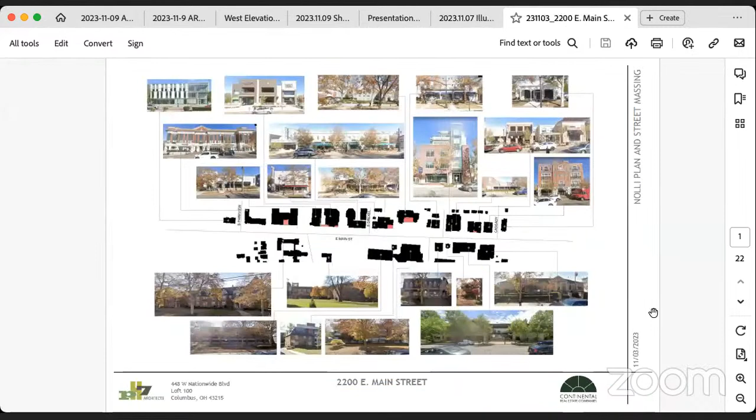Yes, if you want any of those individual sheets. Okay, we'll start here, this is good enough.

Just real quick, for the group, this is what's called a Nolli plan. This is a figure ground of your Main Street corridor, looking at both the north and south side of the street, basically from Parkview Avenue all the way up to Cassidy. So what you're seeing is the figure ground of the building frontages along that entire streetscape.

Then we tried to do a study, pointing out what the building masses on Main Street are and how those buildings are starting to reflect your Main Street guidelines. We had studied this long ago. This was not in our packet for the original ARB, but we did present this during the work session.

So we wanted to point out a way of describing what's going on. In particular, look at some of these red dots — those are negative spaces along the Main Street corridor that act as moments for the frontage of a building, for a patio that's part of a space, or just generally something along the way. But what you start to see is a rhythm and a pattern.

If you go to the next slide, we looked more closely at just Parkview to Drexel Avenue, and you see us trying to understand what rhythms are happening along Main Street and proportions specifically as related to the pedestrian way.

When you're on Main Street, you're interacting with buildings that are generally 2 and 3 stories in height. So what we've tried to do in our revisions, and what we have in front of you today, is really reflect that in the front of the building.

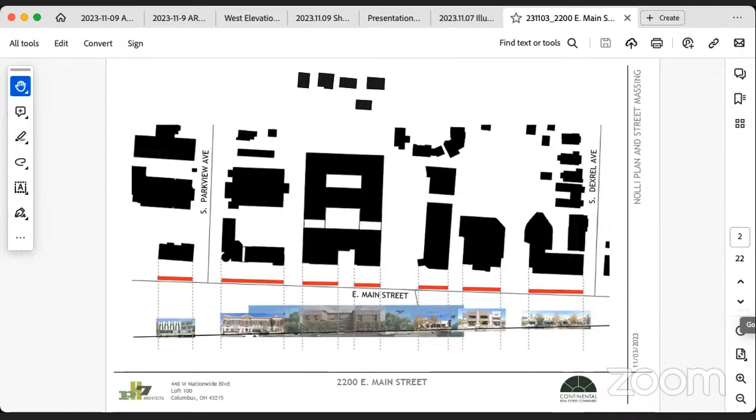Next page, this is the overall site plan. I'll come back to it and let Ryan speak to this in a minute. But I'd like to go forward a couple slides and we'll come back — sound good? Okay. I'll try to point on that one so everybody can see, I do have a pointer.

So what we've really tried to do is a couple things. One is to simplify the massing, simplify the materiality. By doing so, we've created two 2-story facades along Main Street — you've got one here and one here. These elements create that pedestrian way, or the pedestrian scale of your streetscape.

One of the comments from before was, is this a mid-block building or is this a corner building? I think the intent of that comment is that we were really celebrating corners in the last concept. In this design, we've really turned things inward.

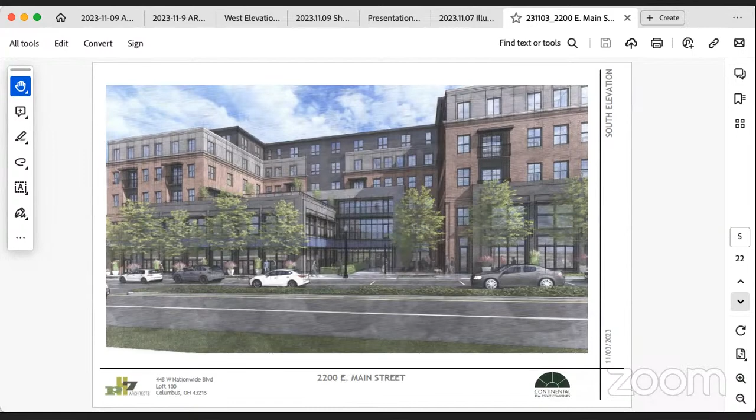Next slide, just another closer up slide of the hierarchy of this. One of the comments we heard, and I hope we're being pretty successful at it, is simplifying the hierarchy. So what we have is basically two masses that are brick facades and then erode the top a little bit by changing materiality. That vocabulary then turns the corner and starts to become a rhythm for the rest of the building, rather than it being more haphazard use of material on a facade.

Block of a building -- I think one of the comments we've had a couple times was what makes this uniquely Bexley, and what can make it uniquely Bexley. I think starting to have an identity of its own that doesn't share an identity with something else is what we think makes sense, and I think these things along the streetscape also tie it into what's happening in your community.

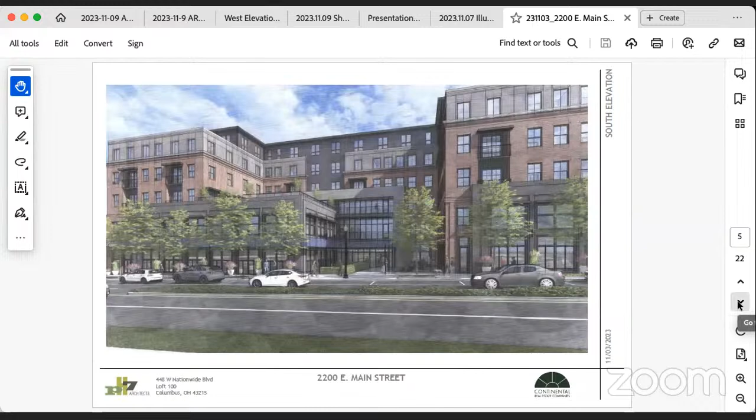Next slide. This is just a close up of that little space we were talking about. You can kind of see potential outdoor dining, and you've got potential entry into another retail space. So you've got this sort of confluence and crossing of different things happening.

You can go to the next slide if you want. This is looking at the other corner. As we move up the streetscape, this is the parking lot here that we're adjacent to, and what we've started to develop here is a public node. I know Ryan can speak a little more about it, but we don't exactly know what this is yet. What we're indicating is that this is the termination of a pedestrian connection all the way up to Bryden Road, so there's a cross connection through the city that terminates at this location. Maybe you can start to solve some of the challenges of the parking lot here, but definitely can activate this corner in a way that we think can be really successful.

The other thing that's interesting in this slide is part of this discussion about a sixth floor. In this slide you can see it a little better. What we were able to do by carving out this is we removed several units here, and we've basically taken a piece of the cake and placed it up on top. So we would call this a partial sixth floor -- we don't want it to be confused that this is the entirety of the building. We're really only talking about a sixth floor that's right here.

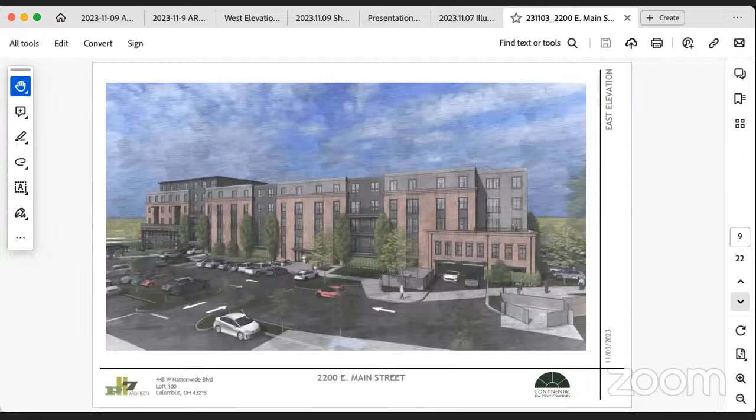So, obviously eager to hear your feedback on that. But if you keep going, I think we're getting close to what I wanted to share. We certainly want to let you guys speak, ask questions, and we're here to answer them. So I don't know if there's anything else on the site I really want to go into, unless you feel like there is.

We're here, we'll answer questions if we need them. Thank you. Okay, we will go next to the public.

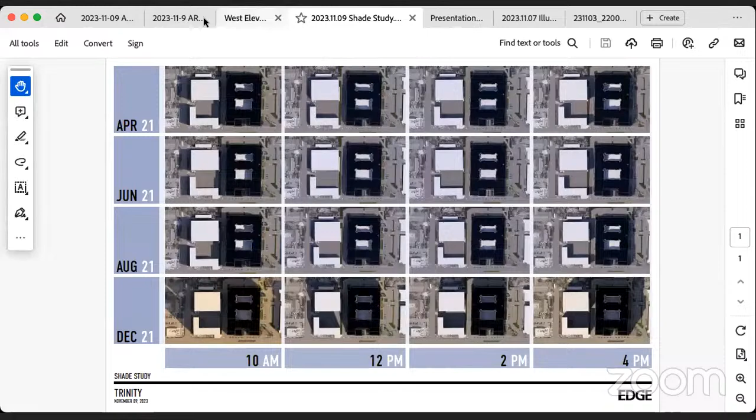What has been submitted for review and approval, which again is not a complete set of renderings, is clearly a case of conflicting land uses, including mismatched density, height, mass, and layout, and does not meet the standard for an affirmative recommendation to the BZAP. Thank you.

The next person that would like to speak, please come forward.

My name is Marcia Hirsch. I live at 500 South Parkview. My husband and I moved to Bexley in 2021 to be near family. We purchased a unit in the Alexander, and we have enjoyed living here in this beautiful and harmonious community where properties continue to hold their real estate values. I have learned that under the Bexley City Code, the Architectural Review Board has the responsibility to protect real estate within the city from impairment or destruction of value.

I cannot see how this proposed redevelopment at 2200 East Main can do other than devalue my property and that of others. The size of this proposed building will mean a loss of privacy, a loss of peaceful views of the sunrise, daylight, trees, and will be replaced with a massive 6-story wall with views of the public parking garage from a 2-lane public road on the west side of the building. How can this building as proposed not contribute to devaluation of our real estate?

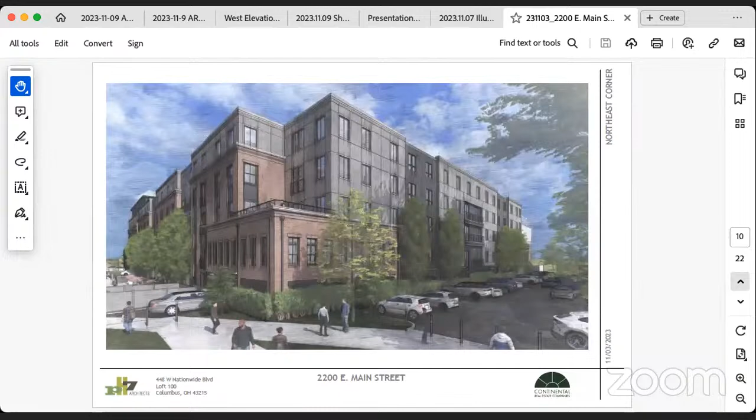How does the proposed design preserve or enhance the character of the neighboring residential properties? Do the quality and type of materials complement neighboring properties? Does the building consist of 4-sided architecture, or is the design diminished at the north and west of the building? What is the lighting plan for the building, particularly on its north and west sides?

How does the design mitigate negative environmental effects of the proposed uses, including a public parking garage, in terms of noise, vibration, dust, and loss of privacy on adjacent residential properties? We need these questions answered. Thank you.

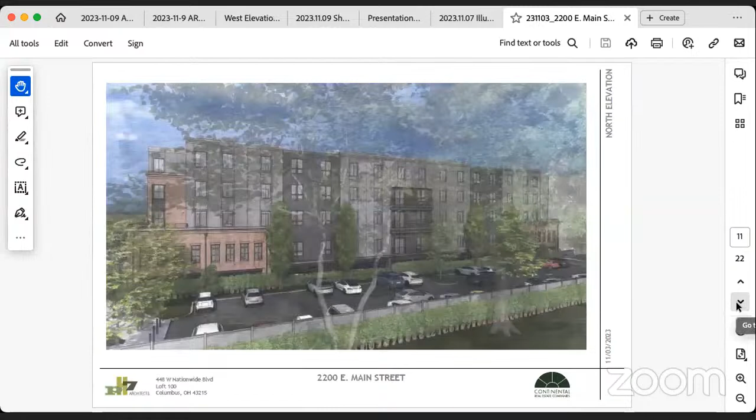Good evening, my name is James Gross. I also live at 500 South Parkview. I just want to comment, you may not know that I spent 27 years of my life with the city of Bexley, 22 as a city attorney. I wrote the ARB, the original ARB ordinance.

What is really troubling to me, I called Karen on Saturday to observe that there were certain portions of the building which were not depicted. There were these side elevations, but there were no renderings. There was the southwest corner, the southeast corner, the northeast corner, nothing on the northwest corner. So tonight we come, and suddenly today we're filed renderings of those buildings.

I don't see how you can expect - this is really, I want to be respectful, but this is very troubling to me that the public is invited to come to a meeting where there are renderings that were supplied today. How do you expect, if the public is to actually believe that their views count, please explain to me how getting them the day of the hearing for people to observe, absorb, talk about, is fair play. You're sending a very bad message to the folks who live here and pay taxes here and invest here. Please think about how you're doing this. It really pains me. And I respect you all in what you do, but this is not right.

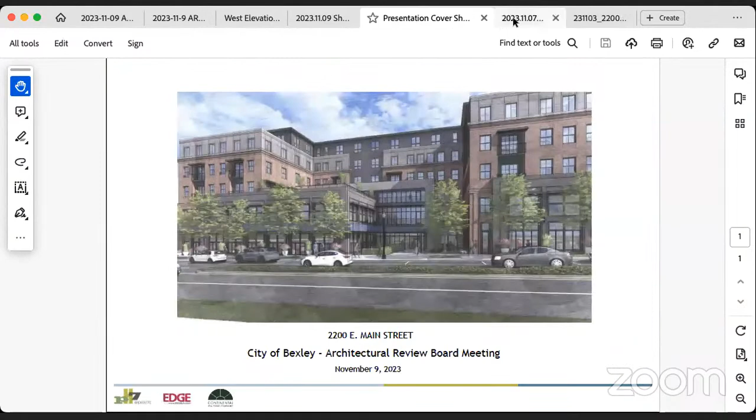There are 2 renderings in the most recent PDF that we were given that are completely missing, that were very revealing, and they are on page 17 and 18 of the PDF from 9/8. Is it possible that you could show that to people here who might not have been here during that meeting?

What I'm actually going to ask is for the applicant to come up and address the west elevation, specifically the back of the building, and some of your concerns, because I know they do have drawings of some of those and they didn't really go through and explain them. These are aerial renderings that were deleted after they were soundly poo-pooed at the previous meeting, from 2 months ago, from the PDFs distributed on 9/8, pages 17 and 18.

Yeah, we have them, look for that. To be clear, not specific to this project, but I want everybody to be aware, I never delete anything. So it's not deleted, it's just in the prior submissions folder, which is all available online. I'll pull them up now, but I just want to be clear. Oh, I know you didn't delete them, they just weren't provided in the newest ones. Right. Thank you. Because there weren't new material.

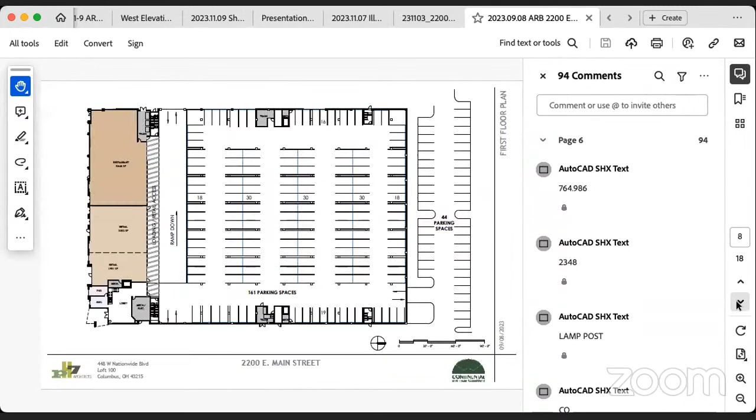Okay, I'm going to ask the applicants to come back up. If you heard some of the concerns, a lot about the west elevation, some about the back of the building, can you come up and go through some of those elevations and explain what your design does from those perspectives?

Yeah, happy to address that. If you could, let's start with the fourth or fifth slide, it's sort of the corner of Hudson. That's this one. I would like to say there's nothing in these sets that we're trying to hide. These are pieces that have been included from the submission that was at the deadline.

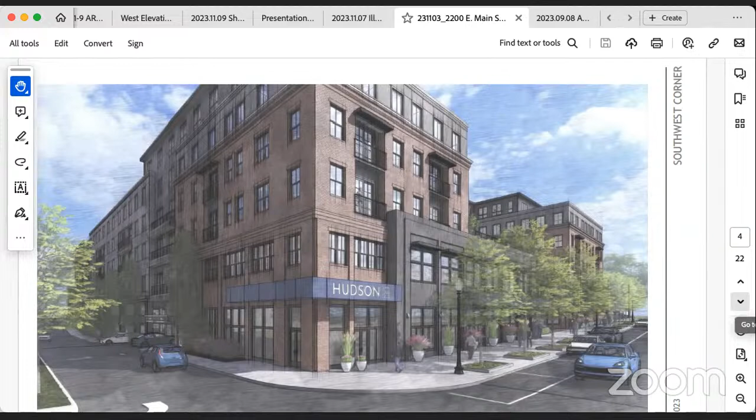So what you're seeing here is a look down the space between the Alexander and the building, looking along that facade. If you go to the back rendering, we can talk a little more about this. We chose not to take this from ground level because there's a fence, and we wanted to make sure you were able to see the entire facade. I know this is an unrealistic view from the trees, like a squirrel's view, but the reality is we're trying to show you more than just an elevation, kind of how this is set up.

We talked a little about this 2-story piece on the corner and how we took the corner off the building a bit. It helps open up the massing of the building on the corners. This is the southwest corner. We also did the same thing on the opposite corner, basically a mirror of what you see here, though we don't have that image in this deck. It looks like this on the mirror side. So we have a 2-story element and an eroded corner on this side, just like here, and the materiality wraps and changes in much the same way.

What you start to see in this image is the grade and topography changing as it comes down this corner. So there's what you see on this end, it's just harder for us to render because of how the topography works.

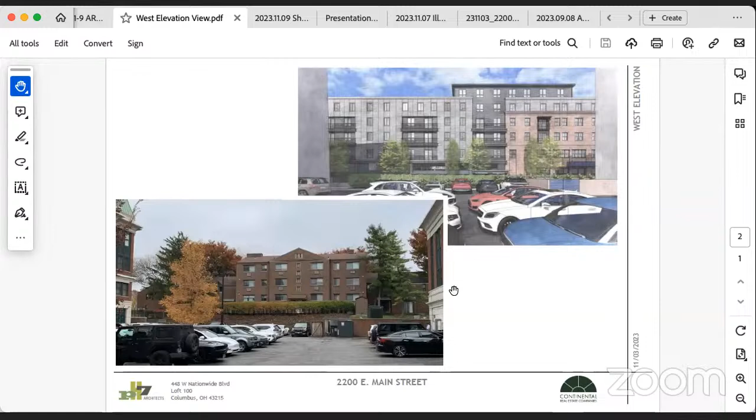So what you need to understand is that when we come through with the new street, we're actually coming in at a level that is down here. This building that is currently there, in almost the exact same plane as far as distance from the property line, is 1 story below ground here. You've got 1.5 stories of first floor because of how the topography works. This vestibule is actually a half story low. Then you have 1, 2, 3, plus a roof line that makes up another piece.

So we really compare this. I'm not going to say this is not higher.

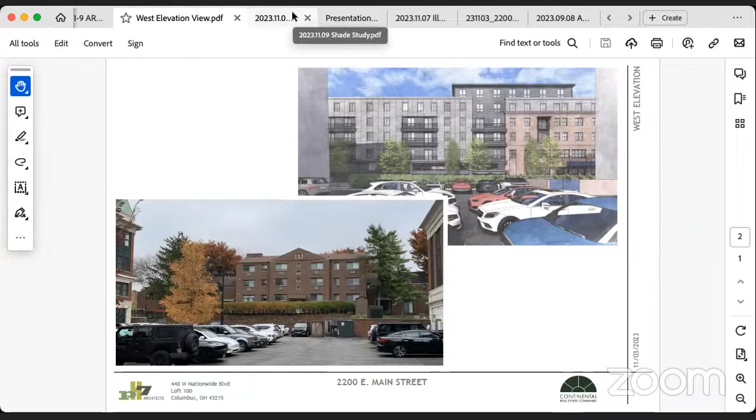This is higher, but this is not at a height that is up here. It just isn't, and I think we need to understand there is mass and building currently there. So to say there's nothing on that site right now, I think is not entirely accurate. But yes, what we're putting up does fill that space up more than what's there. We have these two images and we're happy to talk about them more, so happy to answer any questions you might have.

So you also brought a light study. Do you want to talk about that? I'm going to let you, since I didn't produce it, so I don't know exactly what you were able to do.

Ryan Pearson with the Edge Group, 330 West Spring Street. We prepared a quick shadow study, still in development. We're trying to get rid of the dark colored roof so we can see the actual shadows on the building itself. But I think what it's trying to depict is the shortest daylight day of the year, December 21, showing at 10 a.m. cast shadows. By noon, the shadows in the morning are relatively at the base of the Alexander building, so the thought is by noon the Alexander would not be in shadow anymore, and we'd start going to sunlight for the entire Alexander. As you go through spring and summer months, it only gets better.

Likewise, when you get to the evening time, the 4 o'clock shadows, obviously the shadows are going to be cast to the east. Therefore, the Alexander and the Gateway are really not impacted by our building. It's really just a shadow study to try to show what the actual shadows are going to be on the building in reality.

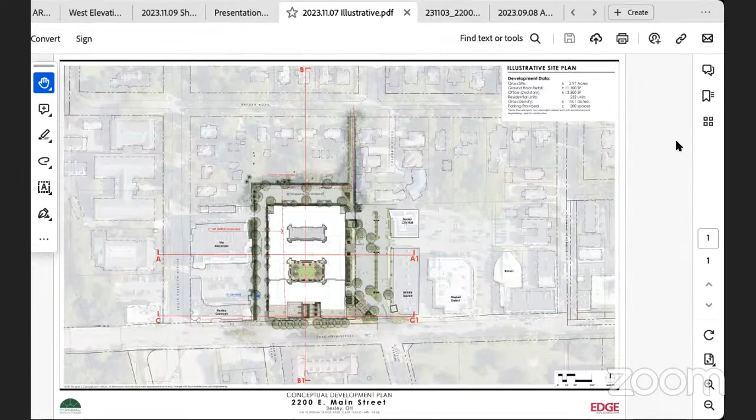And I had a question, because one of the residents was talking about the trees in the renderings, the trees that they show — is that the trees after 1 year or after 10 years? When it comes to planting design and planting plans, we don't design for a landscape that's established in 3 or 5 years. You're designing for a landscape that's at least 10 or 15 years out. You get some establishment and maturity, but really the trees and plant material aren't mature for 25 to 30 years out. Now on a commercial property, we do try to plant them a little bit denser to get a quicker establishment and give some foundation to the overall development.

So I would say planting some of the shrubs at a closer relationship than I might do at my house, or if we're working on a single family design.

There we go. So with the cross section, this is from as-builts on the Alexander, so it's very accurate, I would say. You can see the relationship and the height of the two buildings when it comes to the site and what is going on. And I think I heard Mr. Roush talk about 5 stories over the podium. I would venture to say the Alexander is a very similar architectural type, and although it's not the exact same massing in the north-south direction, it's still a similar or comparable building mass to what is being proposed on this site.

If you combine it with the Gateway and you look at it as an overall development.

I'm sorry, but please be quiet while he's speaking, okay? He was respectful while you were speaking, so please be respectful while he is speaking. You don't need to.

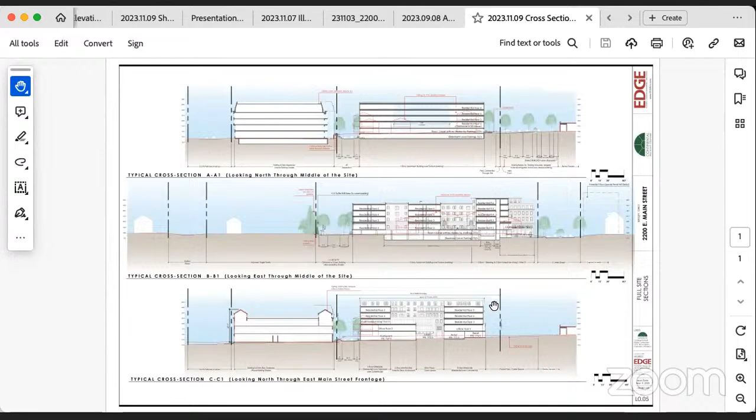Is there any way you can zoom in on the top cross section in particular? As you're looking at the sections, the red dash line shows the grades from the survey, the existing grades. Where Brad was talking about the fall off of the existing site, it's about 8 to 10 feet at that property line.

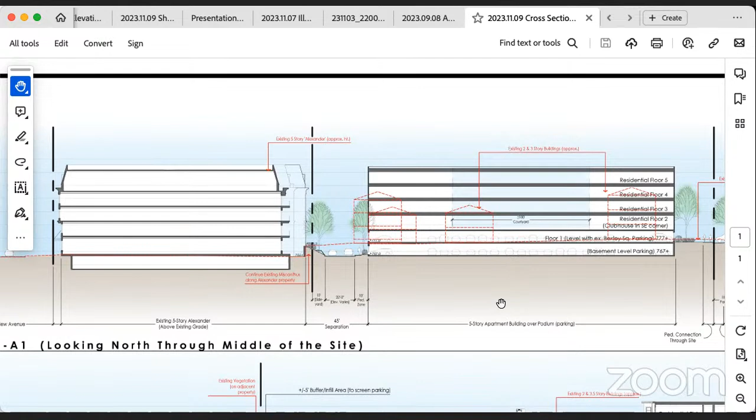Along the west property line, there are currently 2 trees, about 2.5 to 3 inch caliper, small and new, right where the Alexander's driveway connects into our existing parking lot. We've shown a series of trees along that entire property line to provide shade and canopy to the city on both parking lots, and also to buffer between the two uses. So will those trees be as large as shown in the elevations and renderings in 10 years?

Probably not. How far is the Alexander built off of the lot line? Currently there is a location where the easternmost portion of the Alexander gets to within 2 feet of the actual property line. If you got there today, there's a curb right there. Actually, I'm sorry, the building is 5 feet off. The curb where the parked car is, that curb is about 2 feet off of their building, but the actual building is about 5 feet off the lot line. That's true, yes, the building is about 5 feet off the property line.

And then we have another 10 feet of green space before you get to the drive aisle. That's where the trees and shrubs go, and we're trying to replace the hedge that's out there along Rusty Bucket and the parking lot. We're trying to do an in-kind replacement of the hedge piece and the lower shrubs, and in the end it will be more like a mound. Once you get to the Alexander, there's a retaining wall out there today, and we're not exactly sure if that's faced all the way down. So our plan is to gradually take that mound and transition it up to existing grades as it feathers to the north.

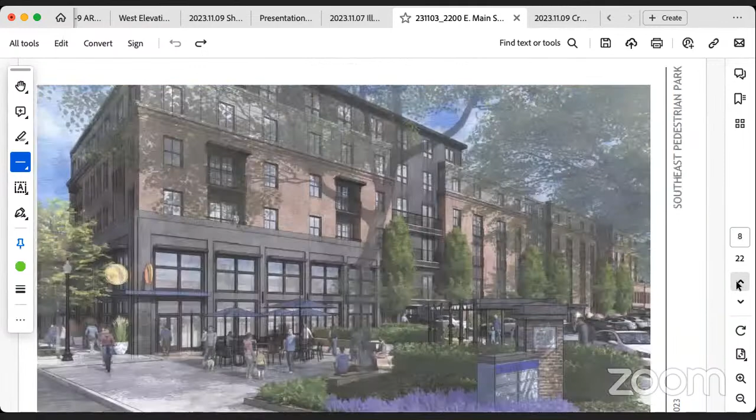So the Main Street elevation, which I think we talked about a lot in our charrette, I think has come a long way. There's a lot of success going on there in terms of materiality, the brick usage. I think it's fitting for Bexley, and I like where it's going. The commercial aspect fits into the Main Street guidelines and what we're looking at for the commercial corridor. But the residential side, as we work our way back to the north, I still think there's some work to do on that.

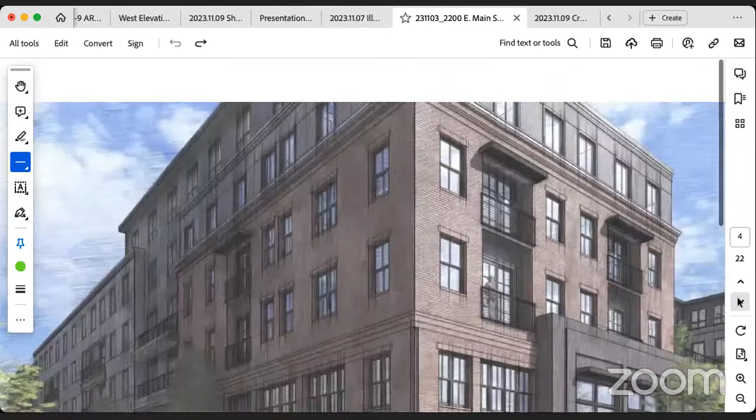The cornices - let's go back to the Hudson 29 elevation or perspective view. We can go to that one. So this cornice line is working, but I was hoping it was going to mask more of that fifth floor. Maybe it needs to have a little more overhang than what we're showing here. This is nicely downplayed.

But then you get to the sixth floor, and I think you're negating it by trying to play down the sixth floor with this shadow line of a deeper cornice. I'm not sure this is the way you want it to work, because now it really reads like a tall sixth floor, as opposed to what we're trying to do with a cornice line above floor 4 and reducing this. But then why would we come back in and do a deep dark cornice line at 6? So those are things to think about.

Those are my comments and criticisms of the architectural image and what I was expecting to come out of our charrette. But I very much appreciate the public space, the pocket in the middle of the block, which helped bring the scale of the vertical portions of the massing into play with, as you showed on your Nolli plan, Main Street. So that, I think, is quite successful.

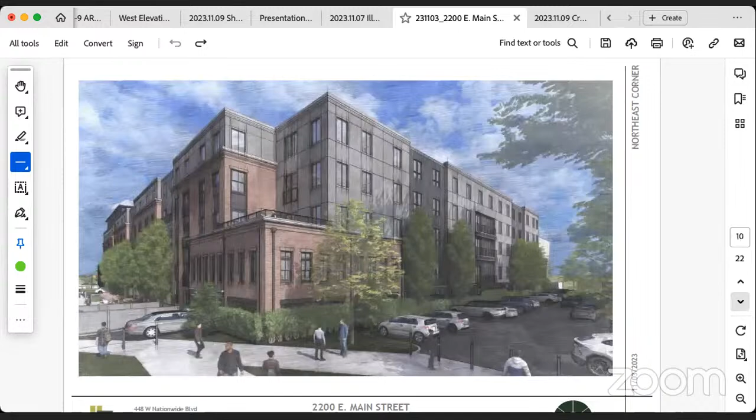But overall, this that we worked so much on in the charrette, having that public space, is a great benefit, and I think it's much more of an urban success on Main Street now since our last session. So those are my comments.

Is that okay with open dialogue? Yes, please come to the mic with your name. Yeah, I would limit it. I understand, I remember listening to you. What's your name, sir? I'm sorry, Don Marshner.

I live at 2250 Bryden. I remember your comments specifically from the last ARB meeting. You were very, and again, I think they've done a pretty good job of addressing the issue on Main Street relative to the open space and exit, and stepping the building back.

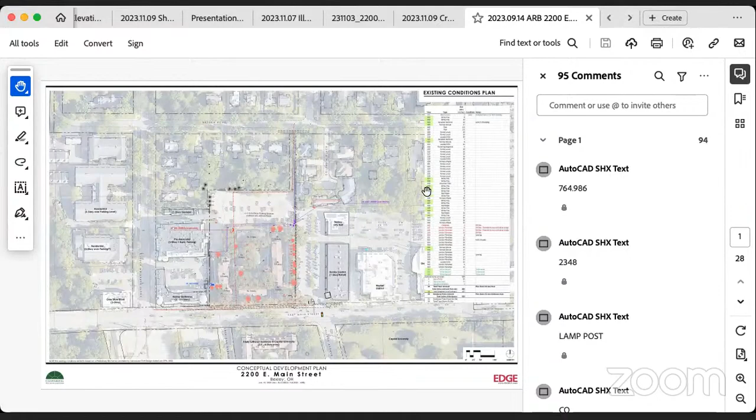But if you could pull up the previous submittal and compare it, especially those elevations we're talking about, the north and the west side, compare those in terms of massing from what was proposed previously and what they're proposing now. I guess my point is you've done a great job, and they've done a great job focusing on Main Street, but they haven't necessarily addressed the issues, again, that you've touched on relative to the residential sides of all this. The massing is as bad or worse because now we've added an additional floor.

They've added additional units. The whole thinking was, after we left the meeting in September, that okay, there's too much going on here and it needs to be scaled back. But in reality, they're adding additional units to the design and development from what they had proposed previously. The massing really hasn't changed. There is very little in terms of in and out, other than the corner they've talked about, or the two corners.

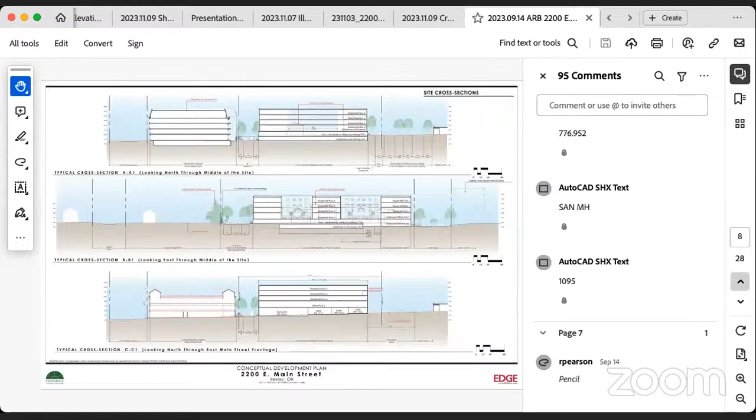You're talking about the north and the west? Yeah, well, I guess I'm talking about all three sides of the building, other than Main Street. Right, so again, I don't see that there's been much change. We've changed materials, there's a different look, they've obviously gotten away from the wings on the corners of the building. But in reality, the massing and the scale of the building hasn't changed. It's actually gotten worse because of the additional floor.

Well, thank you for your comments, but I disagree, and we are asking for more improvements to the west, the north, and the east side. Okay, so if that's the case, there are ways to step back buildings so the perception from the ground is not a worse scale but actually a better scale. That's what I've been working with them on, and all the board members have been working with them to try to achieve. So if you're saying they're adding square footage from what we had before, I'm unaware of that, and if that's the case, it needs to change. Well, it seems like there's more units, so I don't know, or well, there are. I mean, I know.

And additional parking, which addresses one of the issues that we've raised, which is the number of the variance and things like that. And I know that's a separate issue, I think, with zoning.

Can I just finish? So what we are asking for is improvements to the west, the north, and the east. The cornice lines and the impressions that we have from the street on all sides, the grade levels, in terms of what your perception is going to be, we're sensitive to that. Whether you're in the Alexander, on Main Street, at City Hall, or at Brassica—these are all important to us.

Bryden Road—there's no road going back there anymore. There's still a road going back there. No, well, there's not—it's still shown on the plans. That's shown, it's a bike path, a pedestrian path. But yeah, it's still wide enough for a car to be driving around through there. I'm finished with my comments.

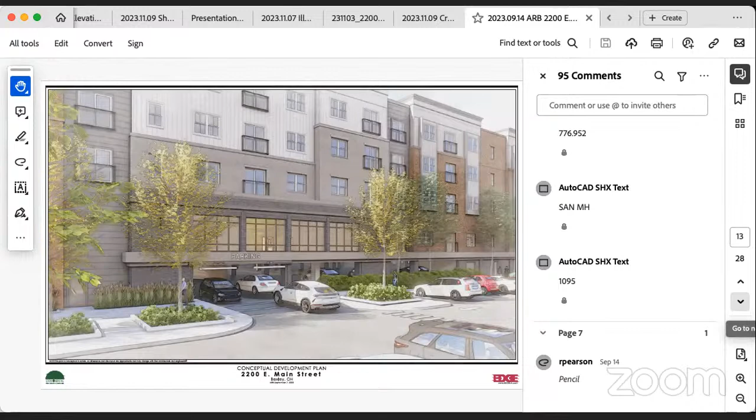I think what this evolution has shown is some of the things that we were saying early on. Cutting back the building, creating setbacks in the building really helped the scale. So I think the Main Street elevation has come a long way.

I agree that the west, the north, and the east elevations all need some more attention. What we've already done on the north, where you opted in and took out parts of the building on the corner, that starts to help out the mass on the corners.

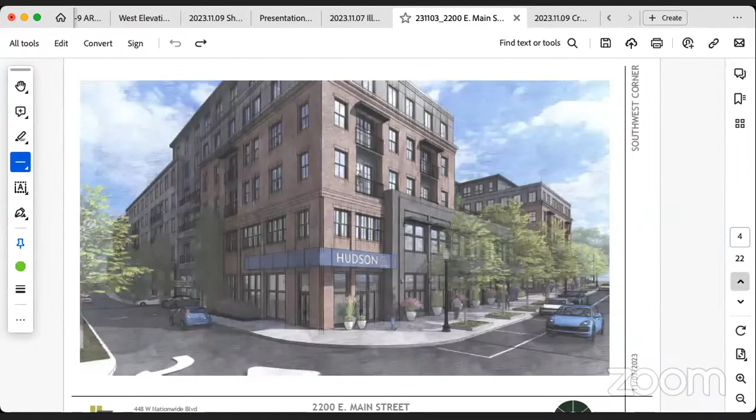The other thing, as Bill pointed out, that I really struggled with when I looked at this afternoon was the facade that's facing City Hall, which has these long column-looking brick structure pieces with black down the middle. The building on every other facade is a bunch of punched openings, which really reads as residential. So I don't really think that is a very strong language, and I think that needs another really strong look.

Back to the Main Street elevation—on the upper floor, we've added the sixth floor. I think adding that sixth floor has actually improved the mass, because there's a lot of building going on at one level, and being able to pop that up actually improves and enhances the mass.

But those two patios, where that sets back, those two areas out front, are those going to be accessible to those units? It's not shown on the plan that way currently, at least I'm not reading it that way.

I think everywhere there's a cutback or a recess, there should be access from the inside of the building out to it—that's what's going to help activate those patios and start to see people up there.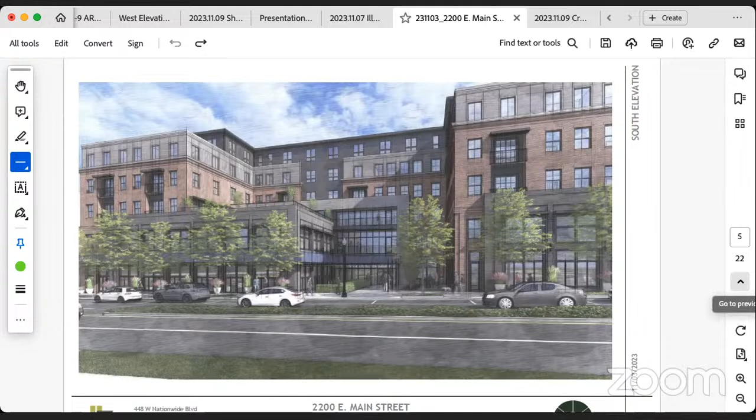The other thing is this recess, this courtyard if you want to call it that, where you're showing the outdoor dining associated with the restaurant. Right now you're showing string lighting going over it, and eventually that dining is going to want to be covered. I'd rather see that be designed into the building versus applied to the building. What you see a lot with these structures is the solution becomes a fabric awning that takes care of that, so I think that needs to be explored.

I love how it's recessed. I think this whole interior courtyard area can really be a fascinating place to go and hang out and have an experience. The other thing I noticed—this is a minor comment.

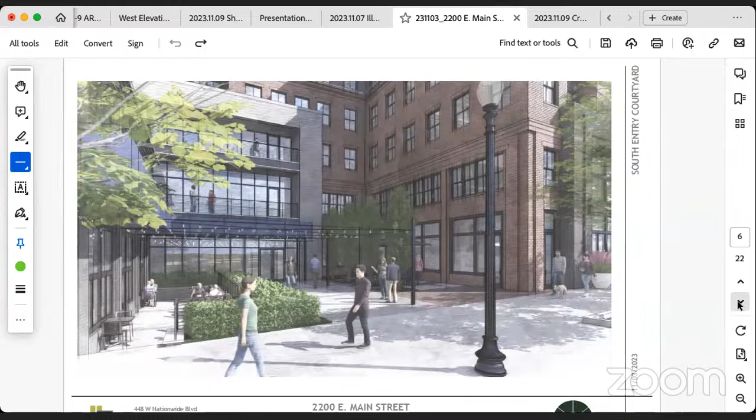When you come into the building, your only way to the second floor, where you're putting tenants, is to get there visually understanding that vertical connection is an elevator. I don't think this lobby is even a two-story lobby, so when you come into the main entrance, you're walking into the ceiling of an elevator and you've got to work your way up. I don't know if there's a way to enhance that lobby to make the lower level feel more connected to the upper level, somehow, some way. I think that would be great if that could be explored.

And besides everything that Bill said, I'm okay with that.

Sure, thank you. So...

I agree with some of the comments tonight about last-minute submittals of information, not only for the community but for our board to review, specifically on a project of this scale and importance in our city. It makes it very difficult for us to review that minutes before a presentation or meeting. A lot of times that happens on smaller projects, front porches and little additions people are doing in our community, and as a board we do our best to accommodate that for our residents. But this building is an anomaly for us to be reviewing and for the community to be discussing. So I agree we need to strive to get that information, and as a board member—I can't speak for all the other board members—but at times that information I can look at and review, but I may need to pause and could even delay a project until I can digest and see all of that.

That being said, I appreciate the efforts and how much this design team—from the landscape, civil, architecture, and the owner—has listened to this board to try to move this project in a direction where the architecture is relative to its location, its context, and its surrounding neighborhood. It's difficult because this site is zoned what it is, and it's not privy to our board. It has parameters by which it can be built, and any developer can come in and build that project. This developer has chosen to do this, and we have to react to that. If we could easily fight it and say no, he sells it, someone else does something else, and we'll be right back here. So what we try to do as a board is push for what we feel is a quality project, something that addresses 360 degrees around the building.

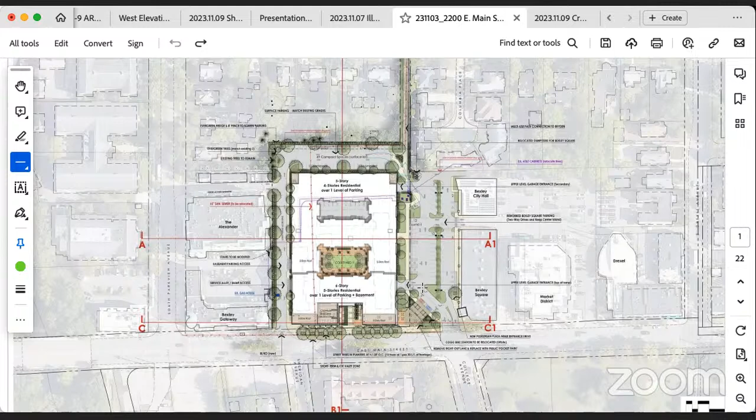We have started to see some improvement on the communication of that design from this client on the north and west side. There has been a lot of focus on the south side on Main Street, and I think, as you've heard from other board members and me previously, we feel it's getting very successful. One of the topics people mentioned tonight is the 6th story, which is big—it is tall on Main Street—but that 6th story is south. The north side of that 6th story is south of the Gateway north side, so it's not at the Alexander where people are living; it's on the commercial side of that development.

But it's still on the commercial side of what I'd call the development of the programming of this site. And then, of course, we've pushed for trying to have the building step and be more reactive towards the north side of this site. I feel that what the designers have brought to this meeting tonight has gone a long way to start to break that corner down.

There's been comments from the other boards, Mr. Heyer and Mr. Hall, about maybe continuing to push that, and I agree with that. I think...

Massing-wise, programming and leasable square footage is a challenge. I deal with it every day, but using facade and materials and cornices - the Alexander is a good example. That 5th floor is a mansard roof style, but it's still a floor. So there's ways to do that on a facade that helps change the scale of the building to help address the neighborhood. I think the architects have gone a long way with the massing, but need to continue working on that facade.

The north facade, in addition to what Mr. Heyer said, I think has come a long way, and we're starting to see what that is. But I think we still need to get some more clear images of how that is.

If you look at that building section, which I think is really important to understand, this building is a 5-story building compared next door to a 5-story building. Even if you look at that site plan again, please - I want to note though, this site is significantly larger in its acreage than the Alexander and the Gateway project.

If you were to scale up that building proportionally, the figure ground of the two buildings to the west versus this new building, which I call a double courtyard with a courtyard on the south, the actual figure ground is fairly similar in building coverage to the landscape. The difference here is that the two internal courtyards aren't seen, and you have a lot of mass wall on the exterior. We've had conversations with the architect and designers to try to open those courtyards up, and the result was to cut the south facade and help break down that massing on Main Street. That's what added those units to the 6th floor.

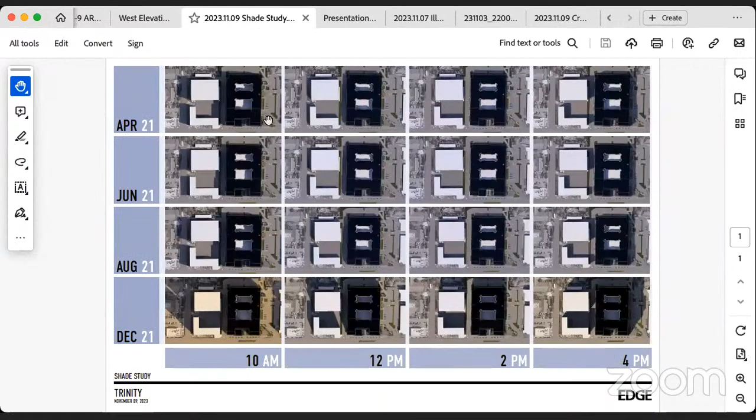Yeah, well, that's the figure ground. So if you zoomed into, and I think this is also very interesting, I think this is good to see.

This building isn't by itself. We have a very large building, which a lot of residents are here tonight, to the west of it. It also casts shadows significantly to its neighbors to the north and west. Though those are different types of properties, we have the bank, some apartments, and the single family to the north.

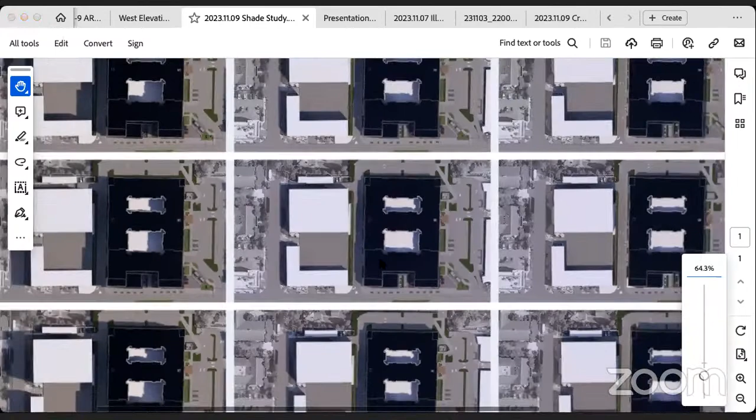There's a significant aspect of the relationship between these two buildings, both being 5 stories. Yes, this building is going to shadow some of the lower floors of the Alexander, but not all of them.

If you go back to the site plan, there's a relationship where this developer has pulled the building off of the north property line. The Alexander is 2 feet from its property line. If you could imagine this building being 2 feet from the property line on the east, that would put these buildings side by side, and that actually wouldn't be allowed in the building code based on what the Alexander was able to do.

So this building's pulled off from the road, which I think is because the developer, by sinking the access to the lower garage, kind of shields that lower floor. But the distance between the Alexander and the single family homes to the north, compared to this building and the single families on Bryden to the north, is almost 3 times the distance.

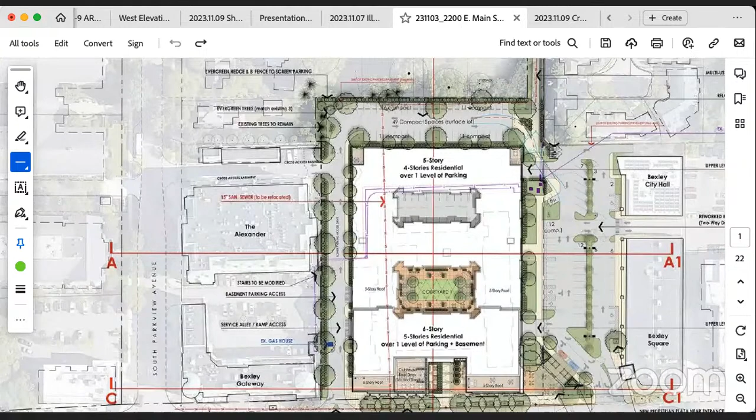So if you scroll up a little bit, the single families, there is a fairly significant buffer and some landscaping. We were walking the site after our last meeting.

Yes, we have a 5-story building looming in the backyard of these single family homes, but in the overall development of this site, given this density and what they're allowed to do, I think they are trying to make these gestures to help soften that blow. We're trying to work with them on the massing as well as the materiality of these facades and how it's treated to help bring quality but also change that scale, so it's something attractive to look at when you're in your backyard.

We can only take it so far because we can't pay for the building, but if this was going forward, we're really as a board trying to get that quality brought out. So overall, I felt it necessary tonight to backtrack and give a summary of our approach to all of this, and the efforts that the developer, the architects, and the landscape architect have made.

Sorry, Ryan, I'm going to mention you by name.

So in that, my official comment going forward is really starting to develop and look at that west facade. I think there's some more work that has to happen on that because of its proximity to the Alexander and what they're going to be looking at every day.

I think the north facade has come a long way, and I have less concern about its impact because of how we step the corners down, softening that building's massing and its presence, which I think is very successful.

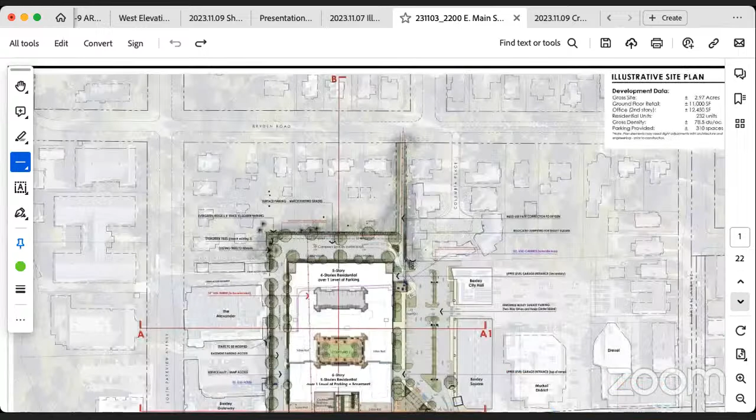And I also like, can you go to the east facade parking view? The efforts that have been moved forward on this, the public spaces at the southeast corner, I think are quite successful. I appreciate all of the incorporation of our comments from previous meetings. There should be one from Bexley City Hall looking back.

How the proposed building, and I do agree with the large bay windows. I'm not against having some articulation on the brick, but I think the dark band between each floor is almost too dark. It's not necessarily a Bexley idea, but having maybe a little bit more color match to the brick would help soften that up, while also giving more of a punched window feel.

But overall, the massing and the approach to breaking this down into 4 masses with a field in between is, I think, successful. How the building sits at grade, how it comes and meets the grade and meets this parking lot, I think is actually quite successful.

The landscaping softens all these transitions. We have 2 major parking garage entrances here and a major entry into the building, but it doesn't feel like you're sitting in just a big blank parking lot. So I appreciate the efforts that landscape has done, and the owner and architects have done, to soften that.

And I think the parking garage at this 2-story corner is actually quite successful. So I appreciate that. Thank you.

That's all I have to say. Thank you. Can I add one more thing before you make your comments?

Sure. Is it possible to get renderings so that we see the neighborhood in context? Because all of these have a greenscape in the background, but not the real urban condition of Bexley. It would also be helpful to do some renderings utilizing a view from Bryden Road, looking through the properties. I'm not as tech savvy as the people working in the architecture and landscape firm, but there's got to be a way to render that in the views.

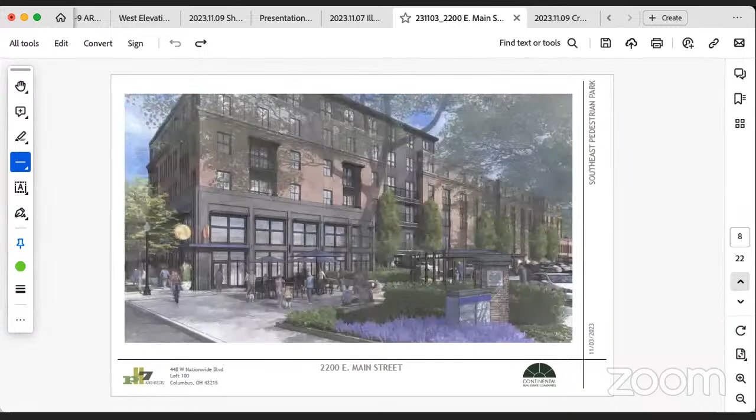Thank you. I think a lot of what Pete said reflects my same thoughts. I originally was pushing for the cutout that ended up on the front of the building to be on the side, because there are very few times you're actually standing and looking at the face of the building, and the face of the building on Main Street is similar in size to the Gateway project. My concern has always been that we needed breaks along the side. On the east side, I think that will be seen a lot as people are driving down Main Street - that whole side of the building is big.

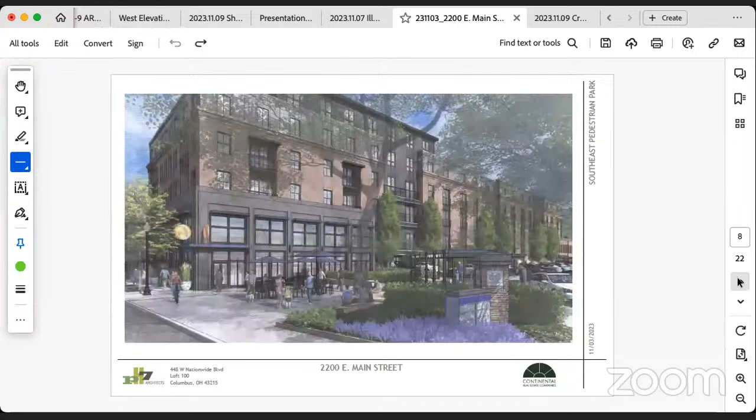It's similar on the west side for the residents who live in the Alexander. The Alexander and Gateway, although one project, were broken into two buildings. I know we can't break this into two buildings, but I think the perception would be nice if there was something that made it feel a little more broken down. My worry was that by doing something so amazing on Main Street, we were going to give up breaking the building up on the east and west side.

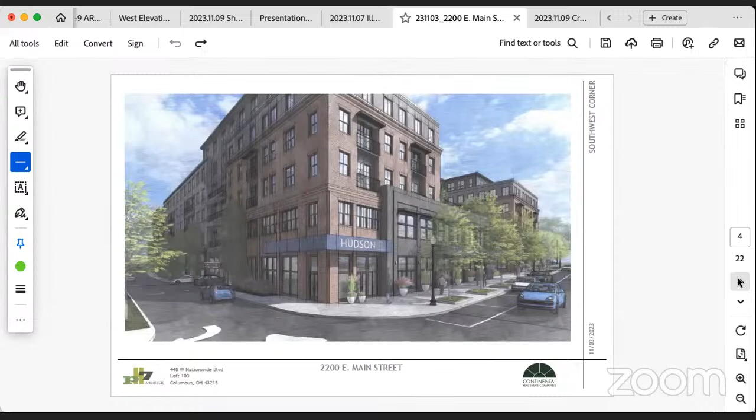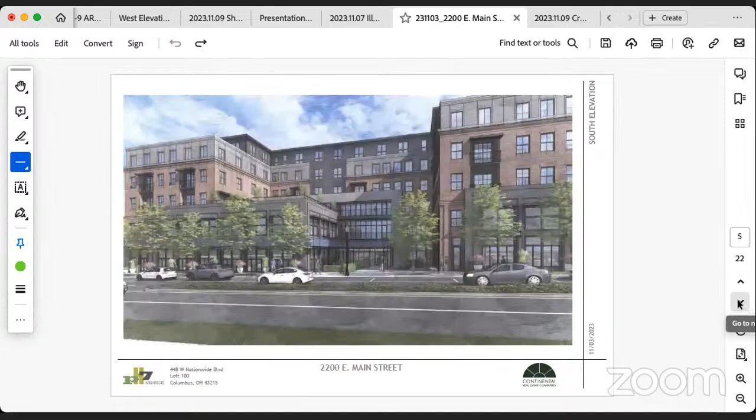I also think the west side deserves a little bit more brick. When I look at that facade, it feels like too much paint, especially compared to the front. But again, this is the east - yeah, and this west side going down, or actually that's the back. The back doesn't bother me as much, because with the fences in the backyards of the people on Bryden and the distance there, if we put brick on the first couple floors, I don't even think you would see them, because of the distance and landscaping.

So I am more concerned about the west side. I don't think there's enough brick on the west side, and I'd love to see something that broke it up more, similar to what Mr. Heyer was asking for. So I do think we have made a lot of progress.

I understand that a lot of people in this audience are not happy about this building being built at all. But the reality is this board did not bring this project here. We did not decide what happens on this site. We are only here to react to what is proposed, and we are trying to make sure that what gets built is the absolute best project that can be built.

It's a very strange process, because people are working every day updating drawings, trying to get us more information, and they could sit on it and wait to bring it to us next month. But by that time it might be too late. In some way they think that by bringing it today, they may be answering a question of yours. So I hope you don't think they're trying to slide it in last minute and bamboozle you, because that is not what happens.

This board deals with this on every project. We don't like it, because it leaves us trying to see what has come in at the last minute. But it does help all of you when you propose your project to be done - it helps you. This board tries to work with the community and do the best we can for everyone involved - owners, neighbors, city, everyone. So I hope you understand that, and that you'll give us some courtesy as we work through this process, trying to make sure this project is the best it can be.

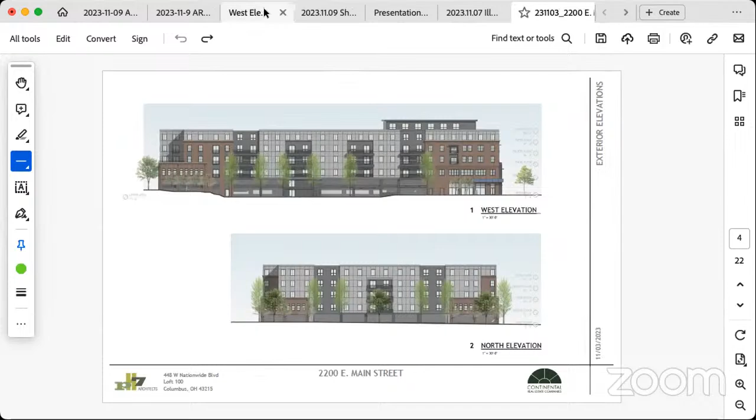This board could schedule a special meeting and have a second hearing on it, but in order to give you the time to get them what they need, and for them to meet and not meet the week of Thanksgiving, you're basically talking about a special meeting in a week, which is likely not sufficient for either side, for you to get it done and for them to have time to review and have a meeting. So that's one of the issues.

Maybe I can offer this, and we've been going at it for 2 hours now. If we could do a brief recess, I could talk to consultant staff, make sure I'm not putting them in a pickle of what they can complete. Everybody thinks it's just a push of the button, but it really isn't. If we had 10 minutes, could talk through the issues, come back, and I can outline a game plan as far as timing and schedule. Maybe that works for you all.

Yeah, I think it's in December. I don't know the specific date, middle of December, before Christmas. And so by that, you need something from BZAP. Correct, that BZAP has approved it, but if it has to come back to us, that doesn't hurt you as long as BZAP has said that.

And you're also assuming that BZAP will approve you in one meeting. Or have a special meeting. They could also have a special meeting. I'm not expecting the whole shot here, but I really would think that we could. I hear your comments, and maybe it's just the optimism I have from working with Frank and where we are from where we started. It feels like we're really very close.

I will say you have made great strides. I think this board feels that you have listened and tried.

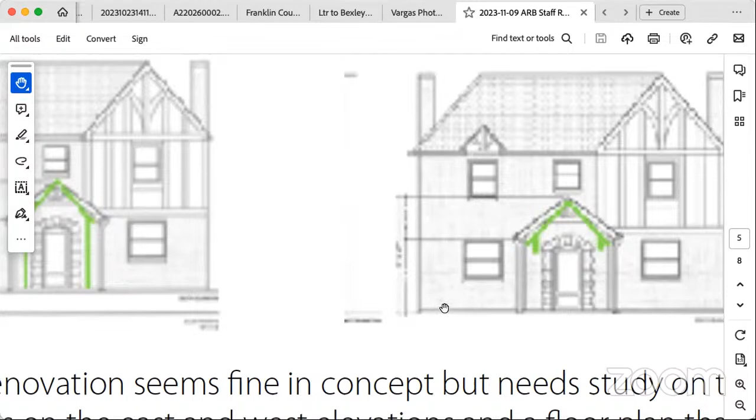So we did do that originally. Part of the reason we extended it the way we did, to the sides, was for the porch and also for the reveal at the top. They have a keystone above their front door that they are really fond of, and they did not want to hide or cover that up. So to try and open that up and make it more viewable, after we did our first set of renderings and plans with the engineer, the customer asked if we could widen that a little bit, because originally we did match the exact pitch. We're absolutely happy to hear your recommendations, and if we need to bring it back, we can, but that's the reason we ended up there.

I kind of figured there was something like that. I was thinking it was the porch, which is why I also put on there that maybe you could just do a little cover with some brackets typical of Tudor architecture. Sure, I think that's all workable.

In terms of the back, I don't think the drawings are very clear how the arbor, the trellis, connects. It's just kind of drawn. So we need to have a better understanding of how it connects.

And also, I really question the window choices for the two sides, the little transoms. I'm sure there's something going on inside, but there wasn't a plan that was clear enough to understand what is going on inside. So I can explain, but those are my comments.

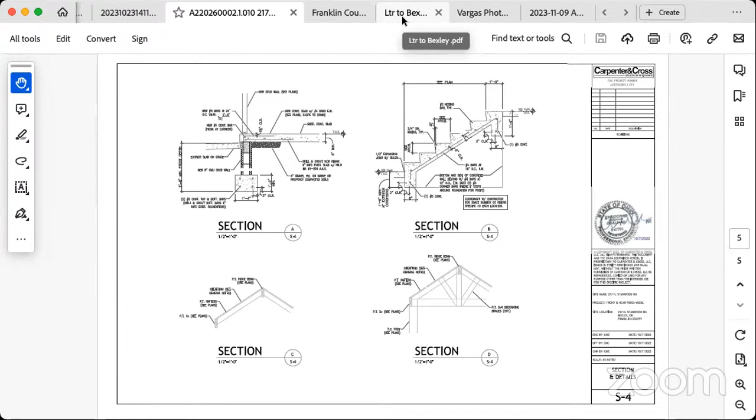The customer made the decision to make the windows on the two sides smaller because of the sun exposure and the way they use the room and when they use it. They felt like those big windows, especially since it's more of a three seasons room, really heated the room up quite a bit. So they were hoping to use smaller windows on those two sides to minimize the amount of sunlight they're getting, which is why they moved to smaller windows on both of those sides.

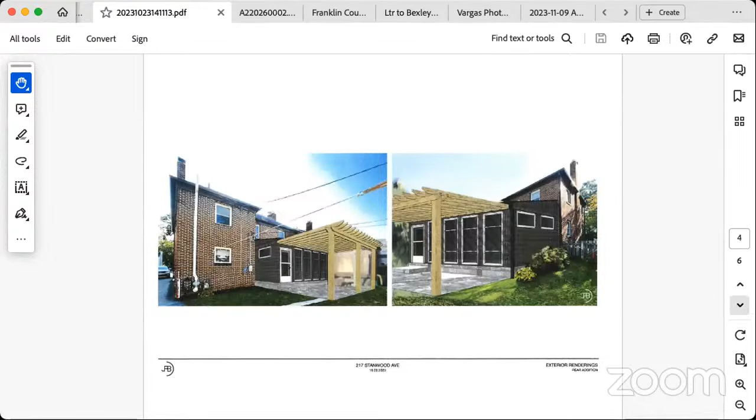Other than that, we certainly can reevaluate that and use windows that match the rest of it, but that was kind of at their request, why we went that way.

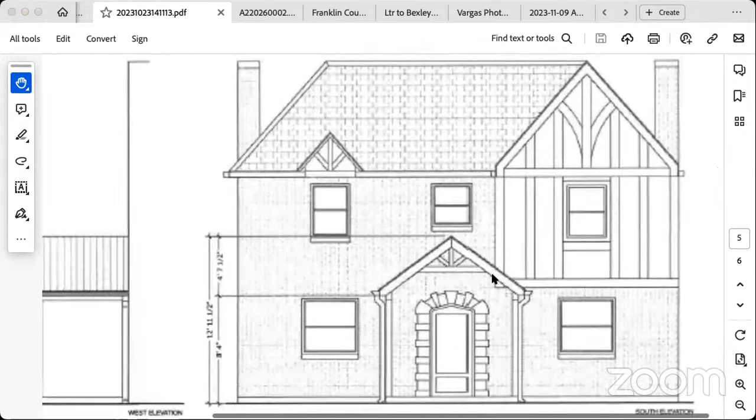So that's good, I can have the architect just change that. As long as it's on the drawing and on record, that's fine. It's not a huge deal.

I do feel it is a little large, and I don't think making it a little thinner and a little shorter is gonna hide your keystone. I get that they want to maximize the size of the porch, so I'm not saying it has to significantly reduce, but it does feel just a little large.

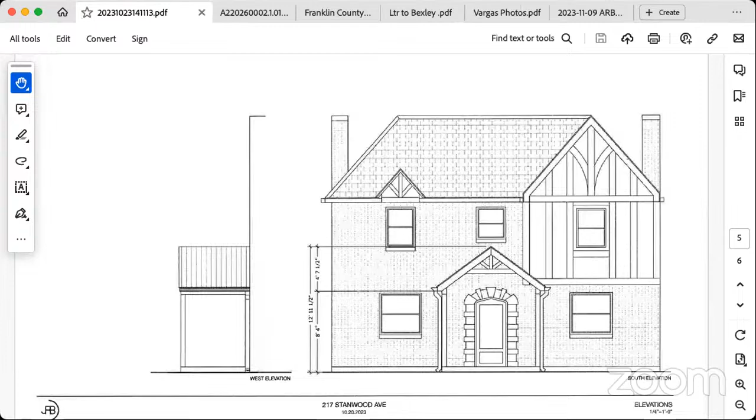I think in my comments to staff this week, it's really the rear and the level of overall quality. I get there's existing structures and things, but even in the photos, which are a little blurry, the details aren't being represented in the drawings well. So I think you're doing yourself a little disservice in the drawing. I thought we had submitted some actual additional renderings through the website. I'm not seeing those come up here. The ones with the trellis, I see that.

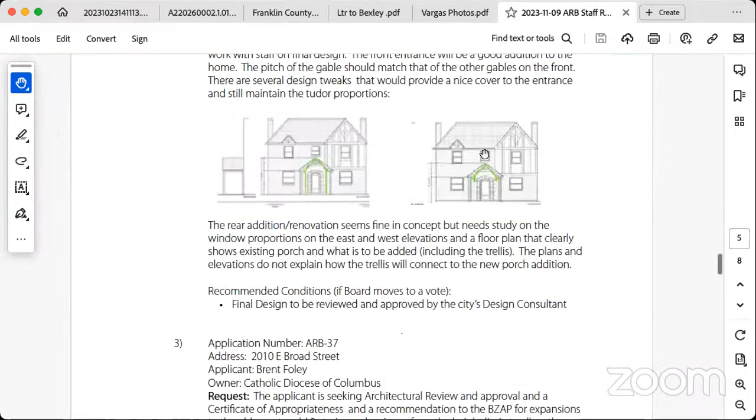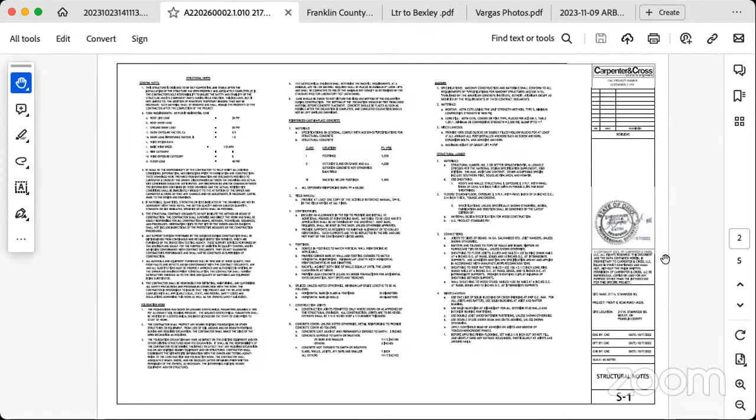I think there's really, you have the white window frames over toward the end of the photos. There's some detail in that photo, and there's actual renderings too. Yeah, I have them in here, I just forget, they're at the end. It was the first one, the first thing in the list. There it is, there you go.

So how this, it's an existing structure, so I get it. I'm trying to understand it, but I would love to have seen a little bit more detail on this extension. It just feels like it's kind of a shed tacked on the back of the building. So just maybe a little bit more trim or a little bit more details at the shed line, just to clean it up.

I don't have a problem with the change of the windows. I have more of a problem with the white windows and the dark facade. But they actually already exist that way, so I'm not totally changing the design. I'm basically taking what they have there and just kind of making it more livable for them. That back door currently isn't closed in, so they want to close that all in with that room, and just make it a more usable space all the way around for them.

So I don't disagree with the styling of it. I think someone at some point thought it matched the Tudor on the front to go with the brown and the white, so we just stayed with the existing design. Sure, and I get it, and I understand that.

I think how the trellis interacts with the building, it looks like there's just kind of a ledger that this thing's getting applied to. Is the rendering representing the existing, or is that a change? Is it floating? It is not going to change, it is existing there.

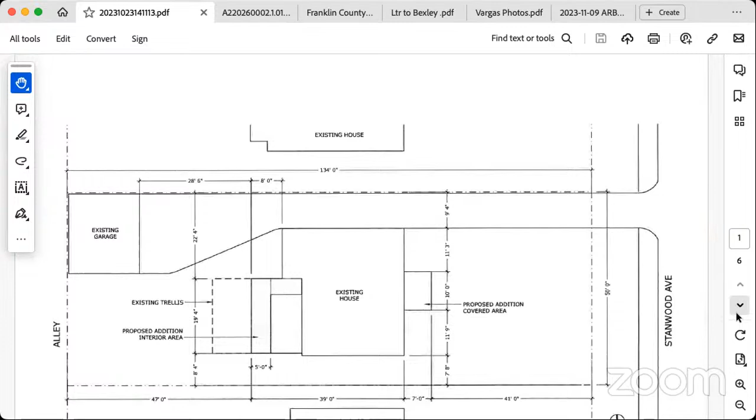But I just don't see how this works. If this front porch is going to be commensurate with the details of the house, there needs to be more sensitivity to the piers, to the way that the eave sweeps, or the rake comes and sweeps down. I think the little truss thing that you're doing...

It's just not of the same level as the rest of the house, to be honest. And then I don't know how you miss that - what Mr. Scott was referring to, the second floor coming out. How do you miss that? You actually don't miss it, so it's going to get trimmed off there is what's going to happen. It's kind of dead space in the house up there, between a bedroom and a bathroom. There's nothing in that area, so we can cut it out and take the roof line right across it.

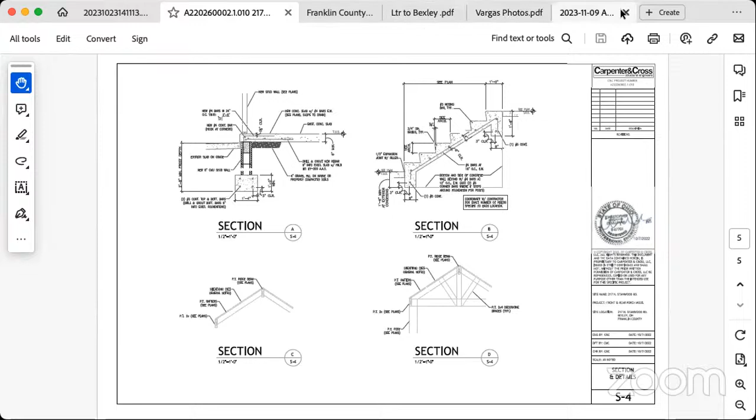Which, to me, that's where all the character is on this elevation, and you're just going to cut it off - that doesn't make sense to me. Trying to accommodate the size of the patio that they wanted, it was originally smaller, the customer wanted it a little bit larger. The client wanted it larger because with everyone having groceries delivered and everything at this point, there was no room for anyone to come up on their front porch or put anything on the front porch.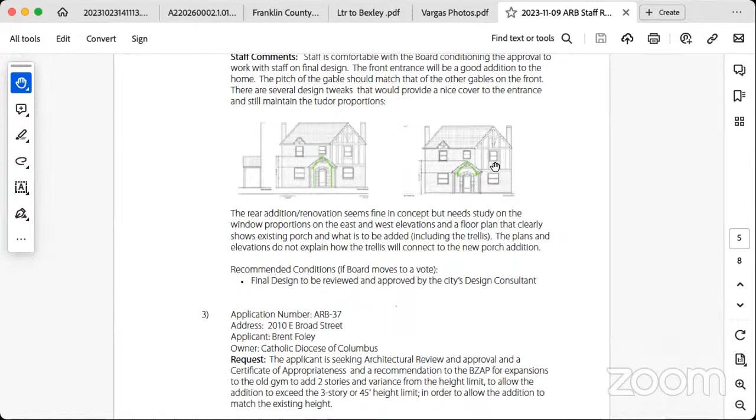Do you know if the architect considered an option of shifting the porch off center of the door to allow that architectural detail to the right? It was discussed briefly. The customer wasn't really thrilled with that idea, but obviously after we get some feedback today from the board, we can probably shift them more in those directions to make this work for everyone.

It may change the shape, may change the way the roof - but how much porch do they want? Because if they're looking to put chairs out there and a little table or something, is that what they're looking to do? No sir, really more so than anything - it's just like, so when they have their groceries delivered, or like when family comes, and obviously we have snow and rain here quite a bit.

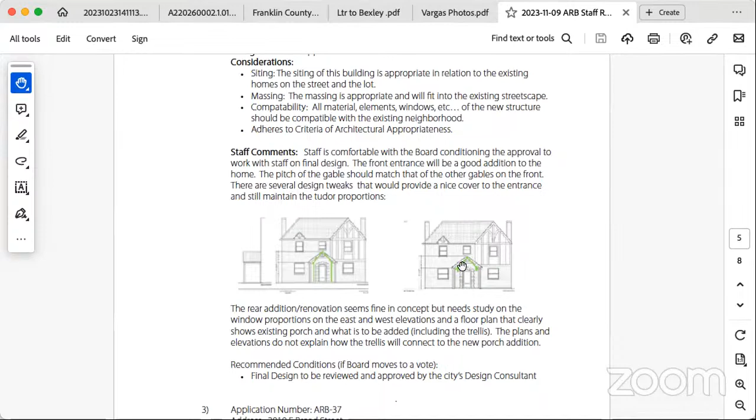And so they just want people to be able to stand under the cover while they're waiting there at the front door, as well as be able to have packages delivered and be undercover at that front door. So they're hoping for like a 10x6 - that's where we ended up after we laid it all out with them. Originally it was much smaller, actually like a 5x4, but that just didn't give them the coverage they were hoping for. So we tried to expand it a little bit to give more of the coverage they're hoping for.

I really just think this is the wrong solution. Even so, you could get coverage and do things asymmetrically that would work. I was even thinking you might make it more elongated over the window to the left or something, create a real porch. But if they're not looking for that, there's got to be another solution instead of doing a gable. To me it just doesn't work, because you're taking away from the character of the front of the building by cutting off that projected gable.

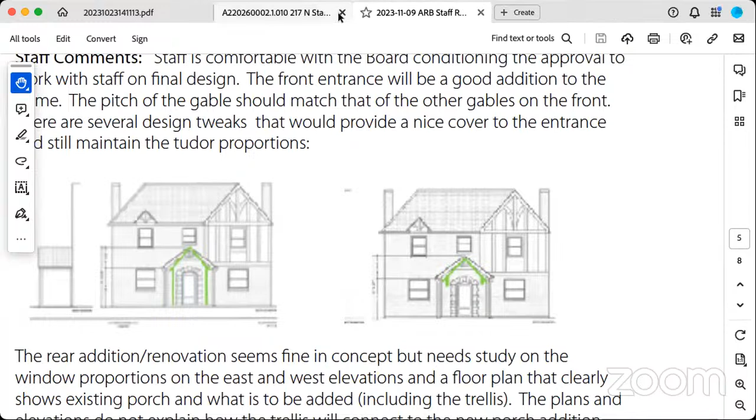Have a good evening everyone. Okay, with that, our last application for the evening is application ARB-37. The address is 2010 East Broad Street. The applicant is Brent Foley, the owner is the Catholic Diocese of Columbus. The applicant is seeking architectural review and approval and a certificate of appropriateness for expansions to the old gym, to add two stories, and a variance from the height limit to allow the addition to match the height of the existing building. I personally think that's a little confusing, so we're gonna ask Karen to explain a little further.

Yes, and we'll swear you in also. Do you swear to tell the truth in your testimony tonight? I do. Yeah, it is a little confusing because there's actually a corresponding BZAP part of this. We are gonna have this as a recommendation to BZAP. The design is pretty straightforward.

I think you've seen hints of it in the master plan, right? Yeah, we actually got approval over a year ago. That's what I thought. Remember, for the first, we're actually coming back with the changes today. The problem is that it is right on the border of the height that was requested, so it has to go back to BZAP. We always err on the side of caution, so I'm gonna read verbatim Kathy's zoning comments, and then I can give my comments about the architecture.

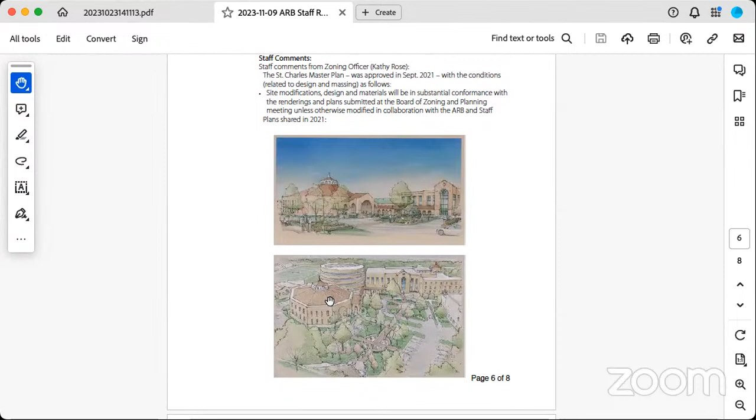The St. Charles Master Plan was approved in 2021 with the conditions related to design and massing as follows: the site modifications and design materials will be in substantial conformance with the renderings and plans submitted at the Board of Zoning and Planning, which are included here. Although that is very different than what... and I'm glad, am I allowed to say that, unless modified in collaboration with ARB and staff.

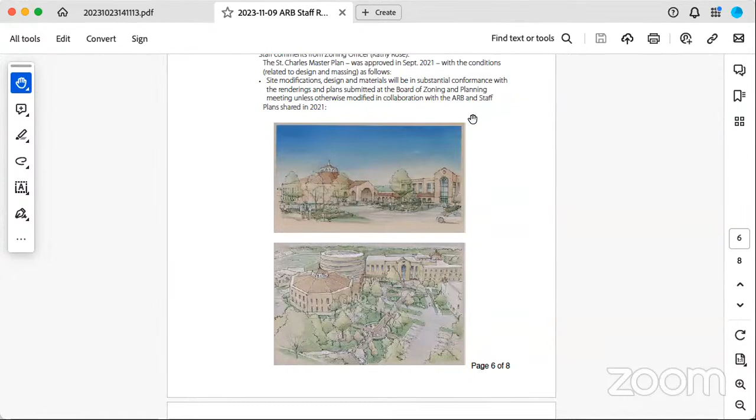So that's one issue. This is a good overhead view, this aerial that shows the construction site. Everything in the black roof is the old gym, where the addition will be on top of. Just this one roof, okay. The applicant is seeking design review and recommendation to BZAP.

As there is a variance from Bexley Code 1254.10, which limits the maximum height to 3 stories or 45 feet, to modify and build on the existing gym footprint and allow the addition to match the height of the existing structure south of the old gym, which has an overall height of 49 feet.

This design of the new addition seems clear in its form, placement, and program. The applicant will have an opportunity at the meeting to discuss and explain the materials, differences between the rendering and the elevation, cornice, arches, details, etc.

I just wanted to read that out loud because it was not what was on the agenda, but it was on the notice, so we're good. But I just want to make sure everybody understands why this is going to be that. Architecture, I have no problem with it. I do think we need to have some clarification on some of the renderings that show it without the cornice arches. We talked about this already today, so I will pass it on to you to fill in the gaps there and the board to make comments. And it doesn't look like we have anybody else left.

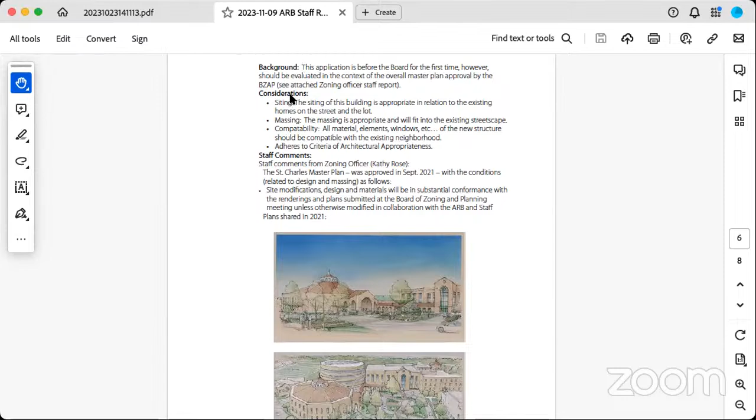Just to clarify, because we did get approval for this project, well, I think it was the summer of last summer. And then we had come back because we made a little error with some things on the other project, which we corrected. And because of that we actually submitted this application because there are some changes from what was submitted and approved back then that are on the application now. So I just want to make sure that's all clear and in the record.

I was going to take you guys through the site plan. I don't think you need that, we guys know this project well enough. Maybe we just talk here first. So what is missing in this application or this rendering, you remember we produced specifically when we were looking at this, and we had given the renderer the information we had approved on this building in the background, but we really weren't paying attention too much to that when he did the rendering, to be quite frank.

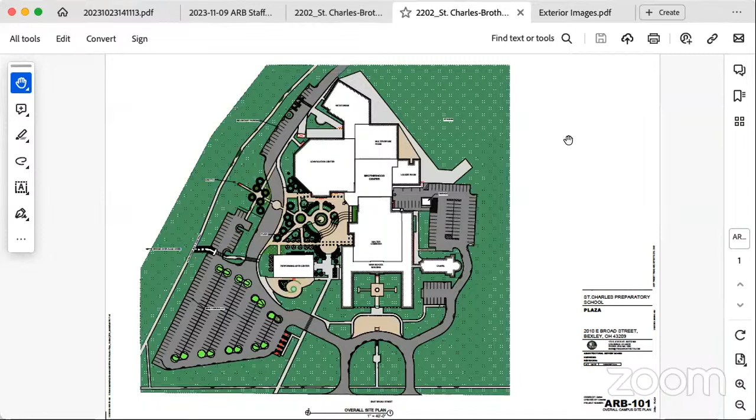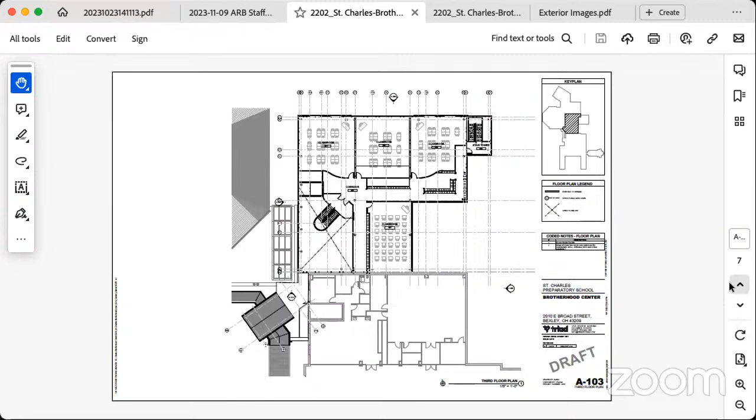If you also recall, before we were achieving the ramp in here, and I think it was board member Scott who mentioned that we had a curved ramp and asked how that was going to work and all those things. Do you remember that comment? We were able to incorporate the ramp into the interior of the building here now, and so now we have a very modest entrance here, which we think is actually going to be a lot more appropriate and not mess with the architecture there. So that's the three things that have actually changed since the last time we were here.

And I think we got the clarification on the brick arches. Just a note that last Friday, the bishop did announce publicly that St. Charles has the approval to move forward with this project. So we are excited that this is becoming reality. So with that, I'll answer any questions.

Okay, who wants to go first? I will, Mr. Scott. I love the new ramp. I can see myself walking on that comfortably.

I would have loved to have seen the curved, circular ramp. That would have been amazing. I think it's the elevation, really, for me. I have no problem with the height.

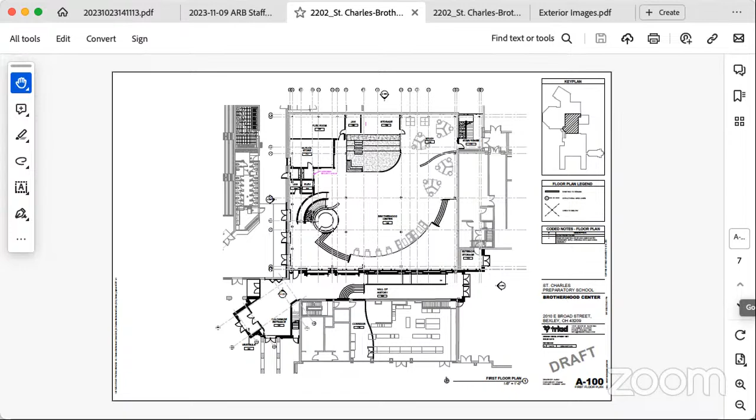This building's really complex. This mass is towards the back, at least off the street, so I don't have any problem with that recommendation. I'd love to see that you guys are doing the brick arches. I think that's appropriate. It's great.

My only real comment is the large glass window, which I think is new, right? No, that was there. That is existing.

What you had us do last time - this is actually Casey representing us this time because I was out of state for a funeral - we did these two sections here and here, where you guys asked us to move that off the face of the building so there's a little bit of a reveal for this section.

And in fact, we also raised the glass because originally it only came up this high, and I think that was Mr. Iyer's comment, to take the glass all the way up to the arch. Am I getting that right, Bill?

Yeah, please. I know I was part of that, but I didn't direct that. So we wanted...

We wanted the architecture, the stonework that is around these two windows and these two windows, we wanted it to feel like it was natural, right? That you have a return here, obviously at the outside of the building, and then you have another little return here. And then everything in between was going to be glass.

However, there is a stud wall that is right here, so you can't take the glass all the way to the edge. That's understandable. So you still have the return here, which is, I think, important. It would have been nice to get that all the way over, but I don't think that's a big deal from my perspective.

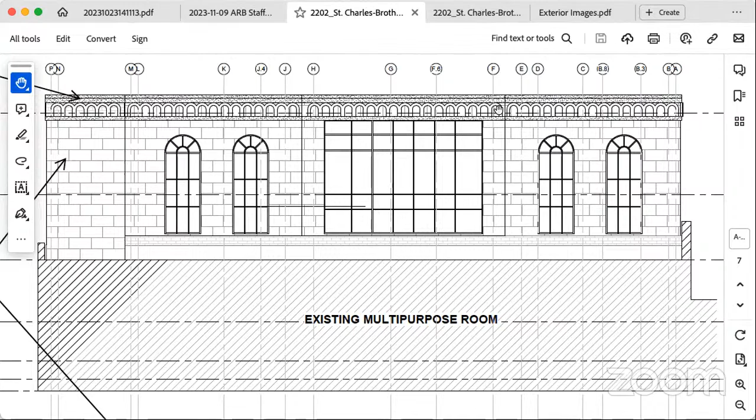I just think that we need to have clarification on what's really going on here. And the diagram that shows that we're going to match what's on the existing building by Kraus, to me, it's not enough. I need to see what this is actually going to look like.

Yeah, and the way you're showing it here, it looks like it's going to be cast stone or stone, which honestly I think would be better than trying to do it in brick, because I think it's going to look - Casey agrees with you, that's why I'm pointing to Casey - it's going to stand out too much if you try to do it in brick.

We're very happy to go to cast stone. We'll make that change. I'm sorry, for the banding or all of it? Well, you're still going to have the detail and the shadow lines and the arches and all that, but it will be in cast stone. All of it? All of it.

Okay, and then it lines up with what's on the other buildings, but you should also not project it. I think this is just a Revit thing, but probably, yeah.

Also the coursing - is this Arriscraft that you're using for your veneer? We were looking at Arriscraft as a product. Arriscraft, yeah, Stone Sheets or Gridworks as the three products. But can you get the Arriscraft...

Can you get the coursing to actually work with it? Oh sure, yeah, we can work through those details.

And then what do you do for the head? Shouldn't you have an actual arched piece? There's a discussion we had as well, and we landed on this, and in the end we could explore that so that it has more like a true arch, is what you're saying, Bill.

Well, I'm just afraid that these windows are going to look like they were simply punctured through an existing solid wall, instead of letting the Arriscraft work to create character on that surround. It doesn't have to be much.

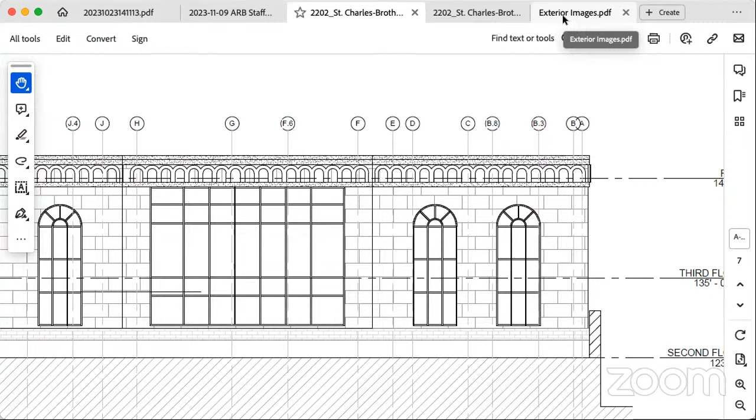You've already got a cutoff piece of stone up here anyway. So that is going to be more St. Charles character, because Kraus was a fanatic about all of his arches and the details that work with that. And you know, from doing the convocation center, that brickwork - when you do bricks for arches, you have to have everything mapped out and absolutely correct. Here, you're not constrained by that, but you want to make it look like it was all meant to be.

I just think this is a Revit thing, and this just needs to be refined more, that's all. So I'd like to see those details - cast stone coping, stone casing/sill, and coursing at the spring point lineup. Got it, so that it all looks settled and more refined. That's all, those are my only comments. I have no issue with the size. The interior and the entryways look great. So that's all I have.

Mr. Hall: My only thing was the arch opening - how the joints in the masonry really weren't lining up with joints in the windows. Other than that, I like the idea of changing the top of the building, I think that's going to be easier. It'll be a lot easier, and our contractor will be happy too with that.